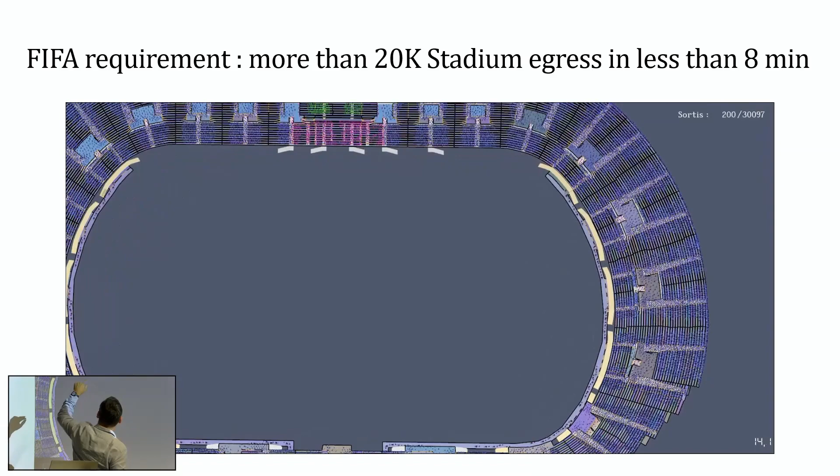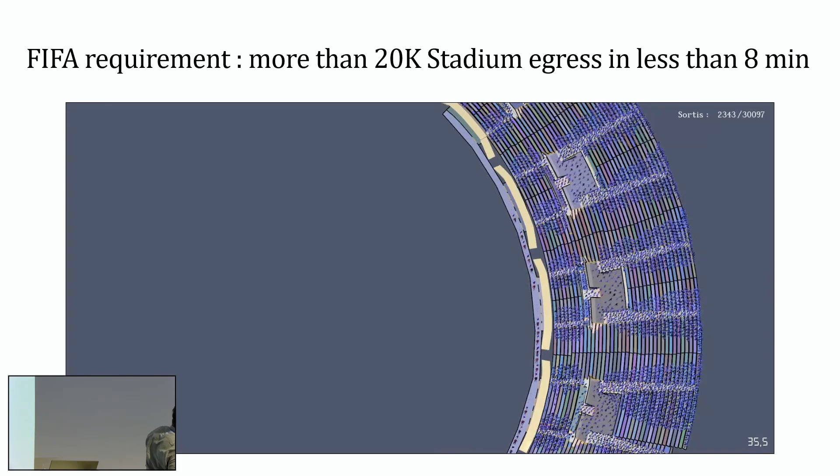If I take a stadium, FIFA requirement or the Green Guide requirement asks for an egress in less than 8 minutes. So for a huge stadium, in this case a 30K fans stadium, you have to evacuate the whole stadium in less than 8 minutes.

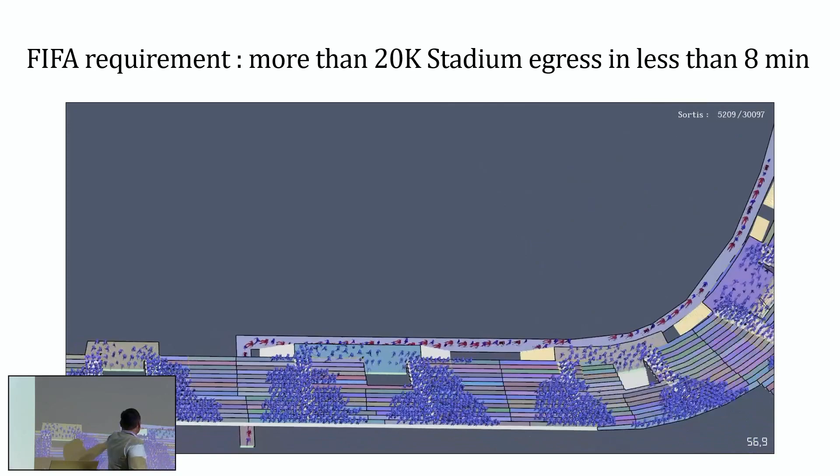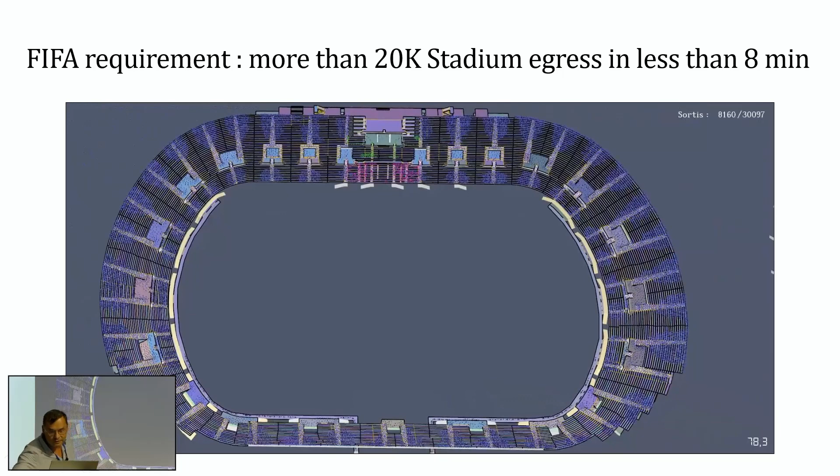Sometimes you also have people in wheelchairs. An interesting thing to know about stadiums is what they call, in French, a vomitoire, a vomitory, which gives you a good idea of how people are supposed to exit the stadium, fast and in bulk.

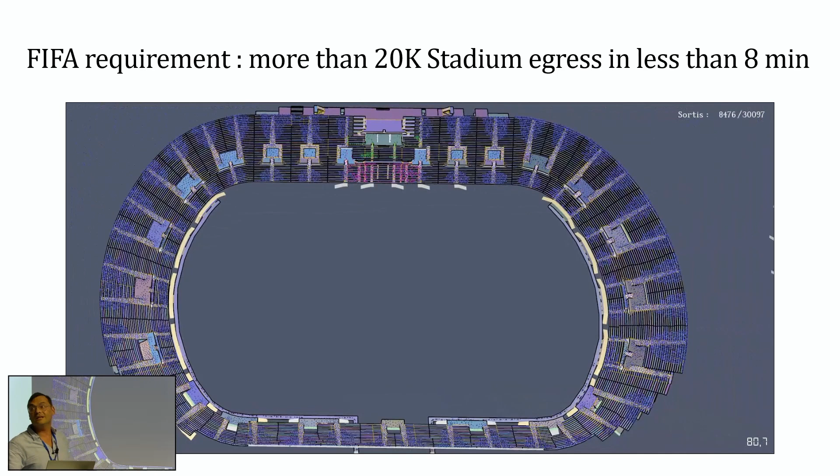And in fact, it's what everybody wants. There's one good reason for that: in all these stadiums there is a big competition for space between safety and money.

If you take a stadium, you always have this: bleachers with lots of people seated, then stairs, then exit platforms, and then the vomitory, where people have to exit in bulk and fast.

And this is money, because people are paying. So as a stadium builder, what you want is as many seats as possible in a small space.

On the other hand, this is big money too because this is a VIP place. But if you want to fit this less-than-8-minute evacuation, you also need space for stairs and vomitories. And of course, this is not money.

Anytime you try to improve the evacuation time, you have to enlarge your vomitories and your stairs, and the result is fewer seats, and fewer seats means less money.

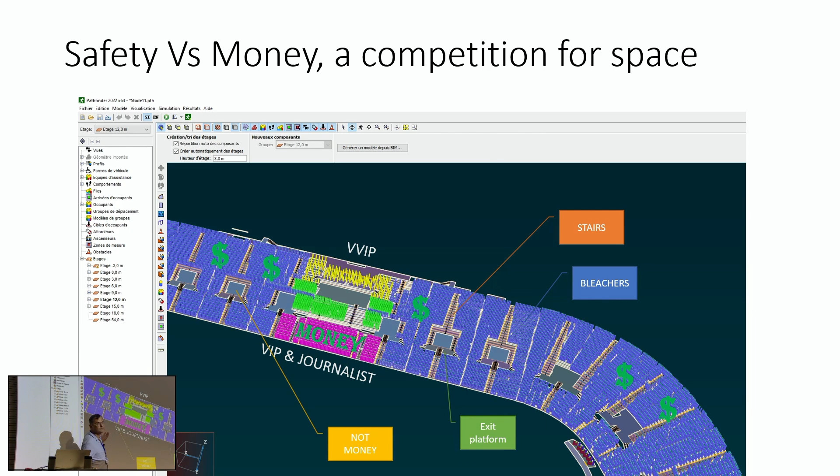There's a specific thing about the stadiums we are studying: there's one geometry which is kind of complex, the bleachers and stairs. The complexity is that stairs are multiply connected with the seats.

This means that in any simulation software—Pathfinder, MassMotion, or any other—you can't just say 'it's a stair' and expect it to behave as a stair. Because it's a stair with as many doors as alleys you have, and between two alleys, in a real stair, you'll have two steps.

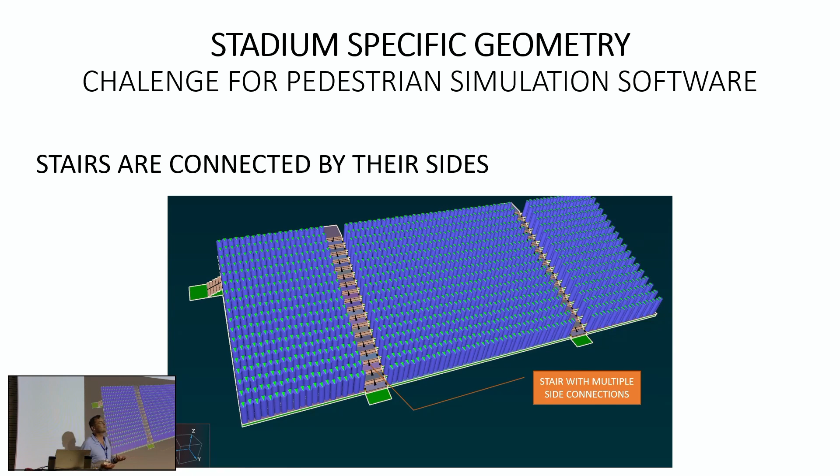So what shall we do with this geometry? And the other thing which has been mentioned by my colleague...

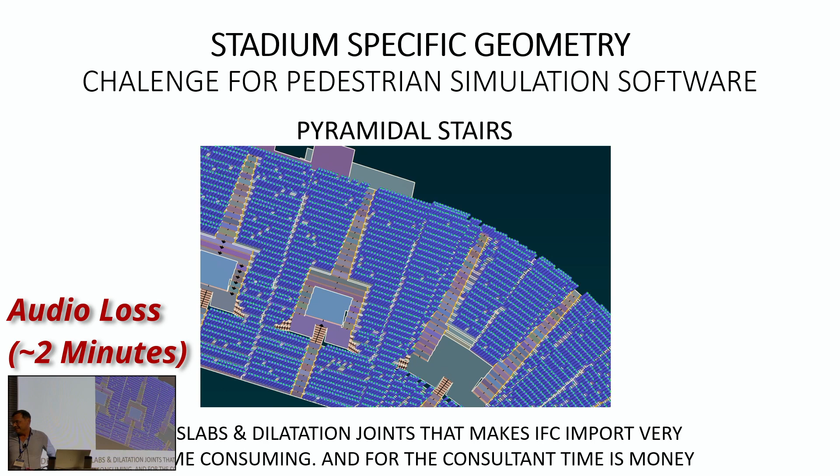Guillaume. Really? Shall I start it again? No, okay, anyway, it was not interesting. The interesting part is after, so don't worry about that.

What I was saying is that when you do a simulation project, behind that there is, as a consultant—because we are not researchers—always a customer who wants results fast and who has no money. So we need to be very fast building the model.

Sometimes you say, 'he will send me his IFC file, the architect will send me the IFC file, I will just import the geometry, populate my model, click on the button, and get the result.' But it never works like that.

One reason it's even more difficult with stadiums is that there are specificities we don't see in other projects. One is those pyramidal stairs: if you want more seats equals more money, it means you don't need those large stairs up there because there's nobody.

Also, one annoying thing when we import these IFC files is that the slabs are non-flat. At first I thought it was a mistake, but no—they're non-flat because it's outside and they want the water to flow, so they're slightly twisted or slopey.

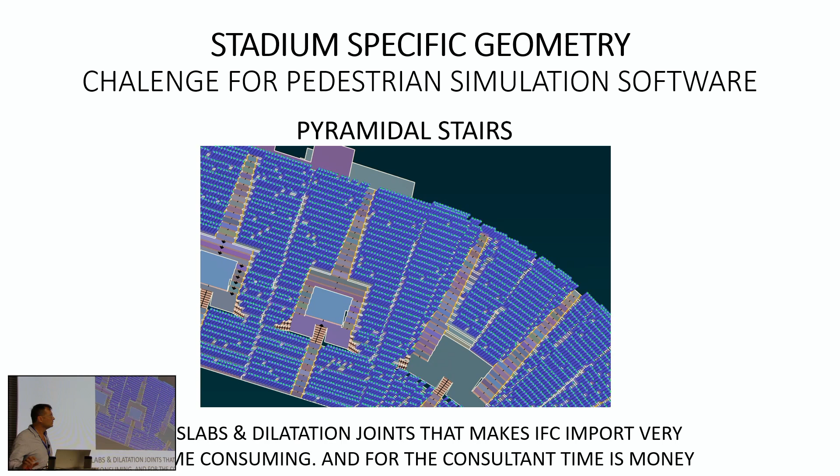Okay, if I come back to bleachers, what we have found in our project is that it's very useful to build a library of bleachers that you will be able to copy, paste, and modify in different projects. Otherwise, it takes too much time.

If you think about a bleacher, you have back seats, exit, front exit stairs. Don't forget about the hide and kiss area—teenagers will appreciate if you don't forget to modelize this area. Having a huge library of those bleachers can help a lot in making the project.

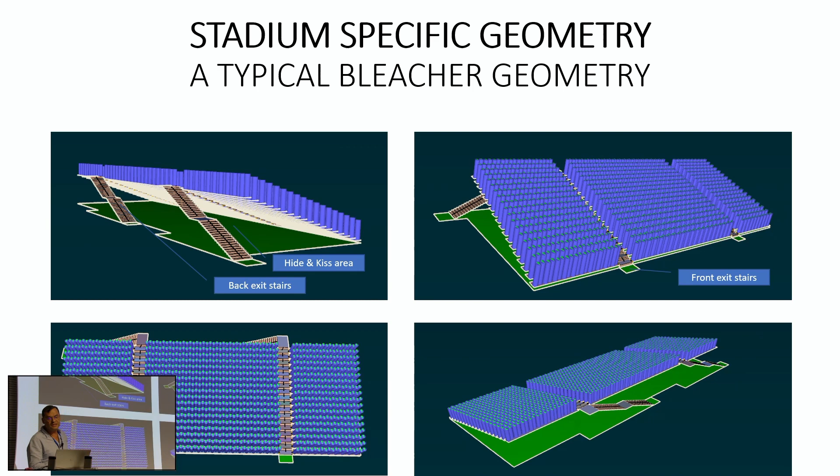So here comes the case study, and this is the very precise question we had to answer from the architects. In Abidjan Stadium, there are two options to link the exit platform to the bleachers. One option was that people would walk this way, take a stair, walk this way, and go out. The other option was that each alley would walk, take a small stair, enter the exit platform, and then walk. The very interesting thing was that option A and option B are absolutely identical in terms of number of seats.

So the idea was, now that we know we are not losing any seats using A or B, can you help us choose if we design it this way or this other way? Construction cost was about the same. So it's an interesting case study where simulation helped architects take a decision, which is not always the case, because most of the time architects have already taken their decisions regardless of the simulation result.

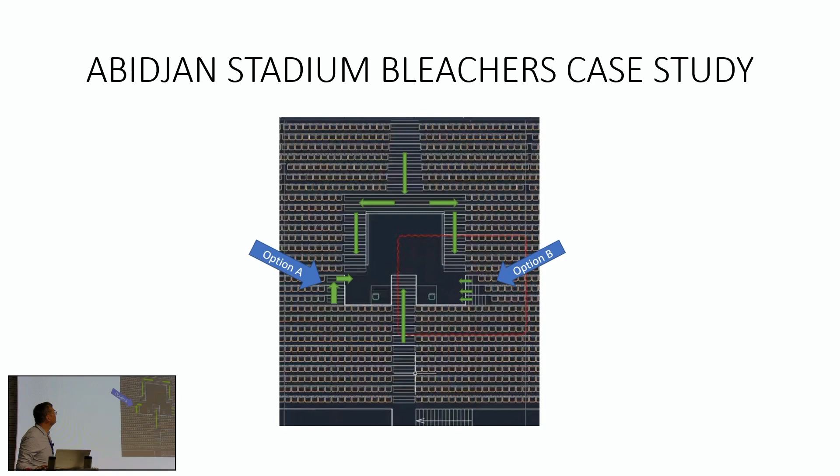So what we did is we built a small model of each case. This is option A, this is option B. There are exactly the same number of people, 1,028, with exactly the same characteristics. In fact, they were made by copy-pasting and just modifying the connection. This is option A, with people going up and then turning, and this is option B, with people going in small stairs to the platform.

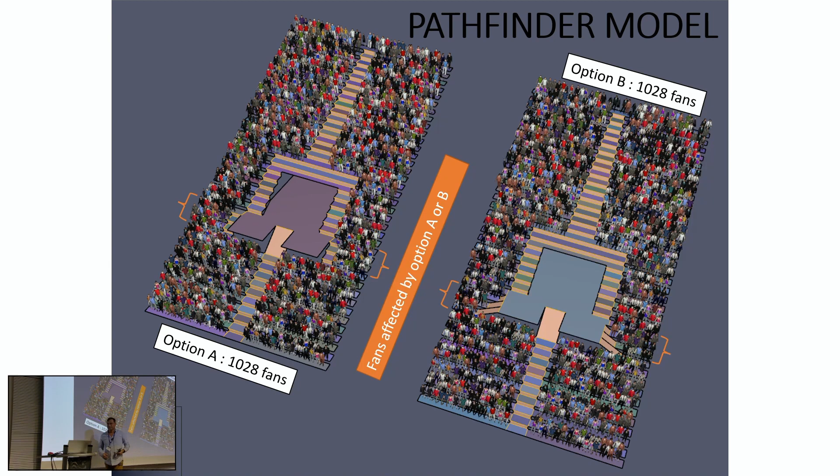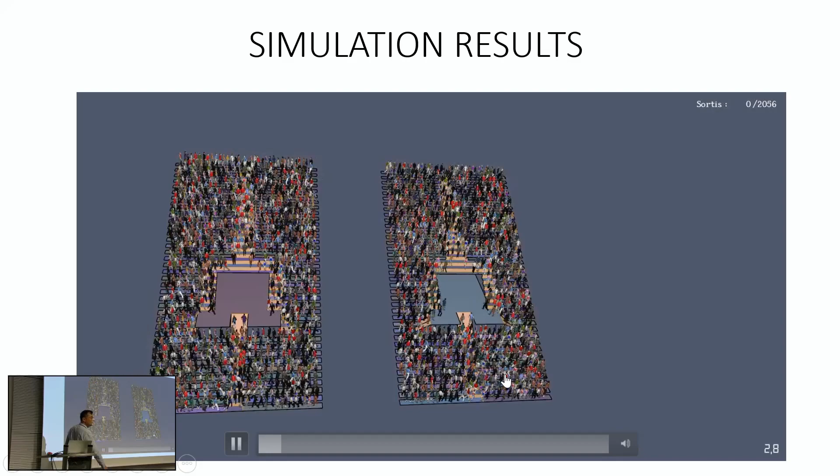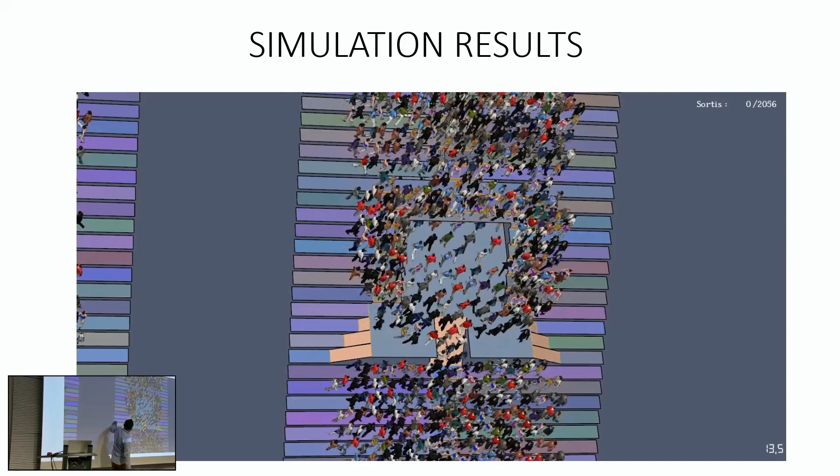If we do this simulation and try to compare those two situations, we can see that here they are emptying quite fast in these three areas, while here they are still stuck because they just move here and are blocked by people going down.

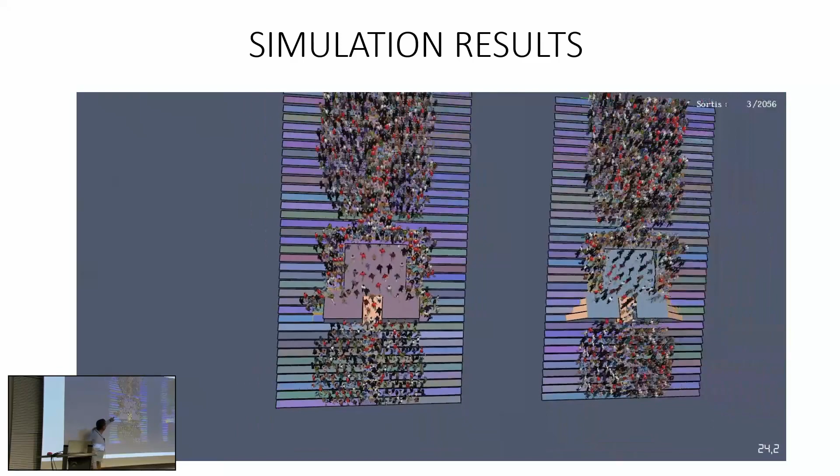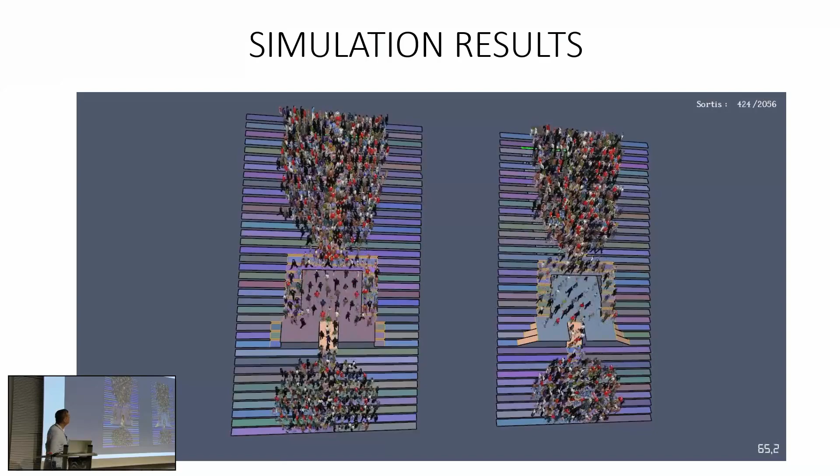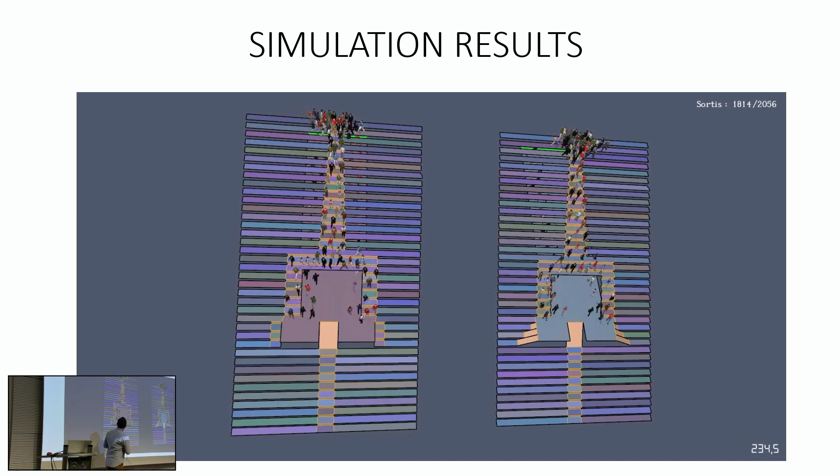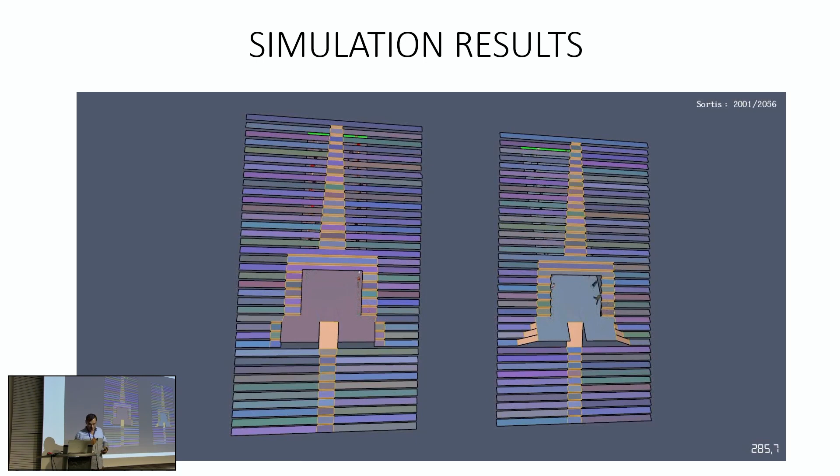But at the end, the thing which is quite deceitful somehow, it does not make any difference. So the evacuation is about the same for A and for B, which was bad because I preferred this one to this one, but reality is that it does not make any difference.

And then after it's symmetrical, it's identical. So what we can say is that option B gives better results during the first 30 seconds, then option A catches up and equalizes, and at the end, for the last part of the simulation, it's the same.

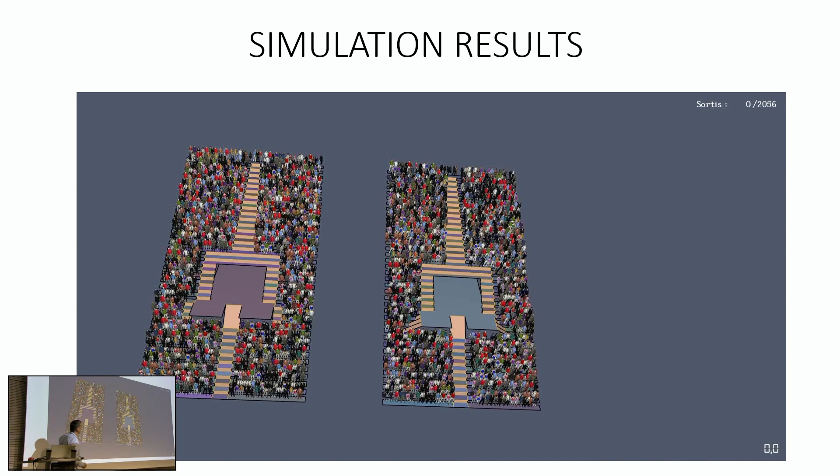So in this case, finally, this video helped the architect choose the option with people coming from the side. It's a good example of a case where a small simulation led to a decision that convinced the architect to change his plans.

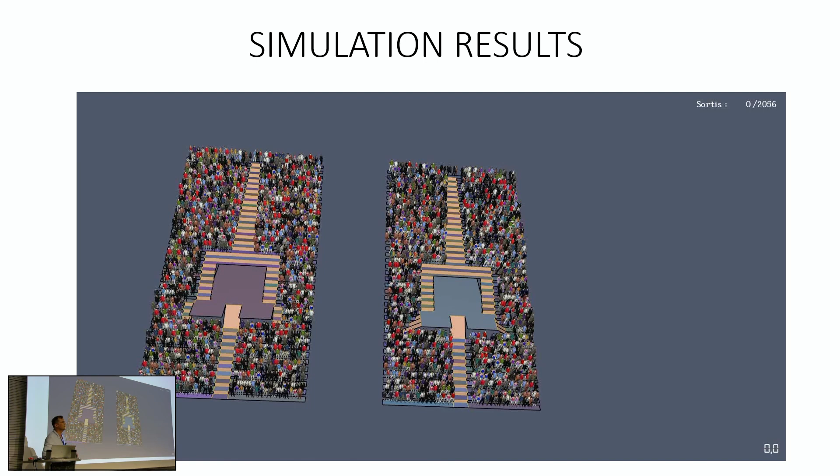And what we lack is, we put a lot of effort in trying to find ways to adapt our models and our geometries to those bleachers and those stairs. But we have no data. We have no measurement of how fast you go from an alley to a stair, to a perpendicular stair. And we are just obliged to make assumptions, to make modifications so that the model works, but there's no guarantee that what we're doing is reality. It's just a model, it's just a simulation.

The good point of this is that somehow people think it's very precise, and they buy the result, and they take their decision. It can be a pity, but on the other hand, it's something good, because somehow you manage to help people take decisions with the best tool you had. But we just have to remind people that they're taking their decision on that, and they are not taking their decision on this fantasy of a twin stadium.

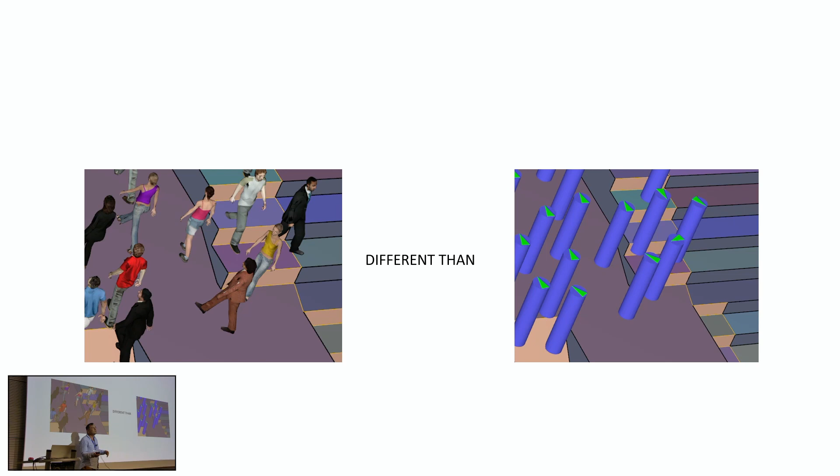There is no twin stadium. There is a model that is based on a very simple assumption of cylinders walking at a speed with a direction. Okay.

Thank you. Great. Questions in the room? Okay. Let's go this way.

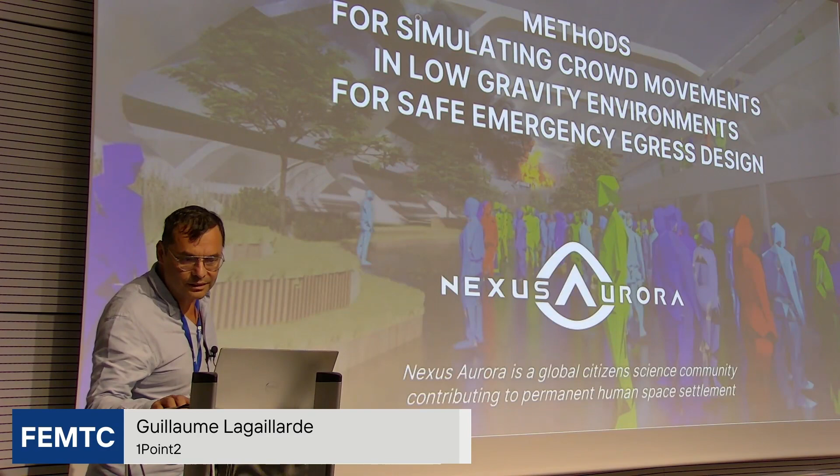Hi. First of all, thank you. It was very interesting. I was wondering, you mentioned at the beginning the 40 centimeters of the aisles, and I was wondering how you implemented that in your model. I cheated. Now, in a model, oh, sorry, I went too fast. I just cheated. I said I'm on the moon, and it worked.

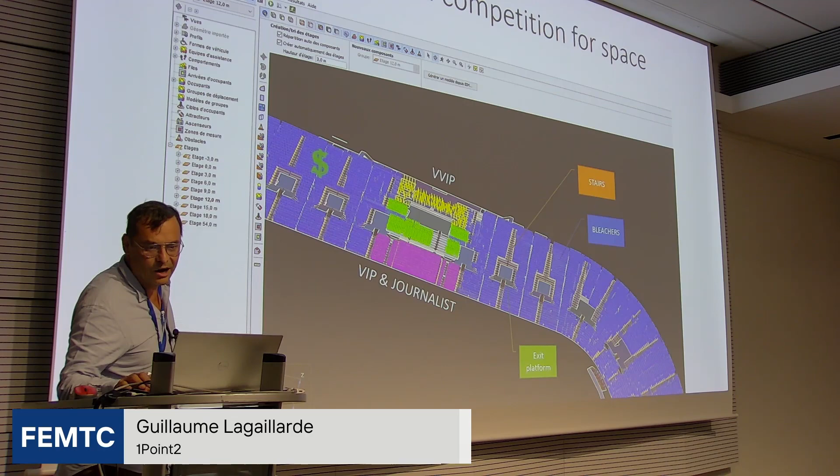No, in fact, what we did is that we just erased the seats. And we assume that if I've got an alley like that plus a seat, I've got an alley like this. And then I just enlarge my door here. So you are forced to cheat somehow, because your cylinders cannot sit. So as your cylinder cannot sit, and as you're not doing a micro simulation, a sort of ergonomic simulation with people with legs and arms and everything, then you have to remember that your agents are cylinders. So then you need to adapt your geometry to your agents.

There's no other way. And that's why it's legitimate to cheat, because you have a cylinder that is averaging a very complex person. Then your level of detail is this. And if the level of detail of your geometry is much higher than the level of detail of your agent, you're making a mistake also. You need to have something which is homogeneous in terms of hypothesis. This is why we cheated.

And we cheated by saying, okay, we just get rid of the seats and enlarge the access to the stair. But in reality, the access to the stair is also enlarged because you've got those two steps and you can access here or you can access here. So it's legitimate to enlarge your access because it's already enlarged.

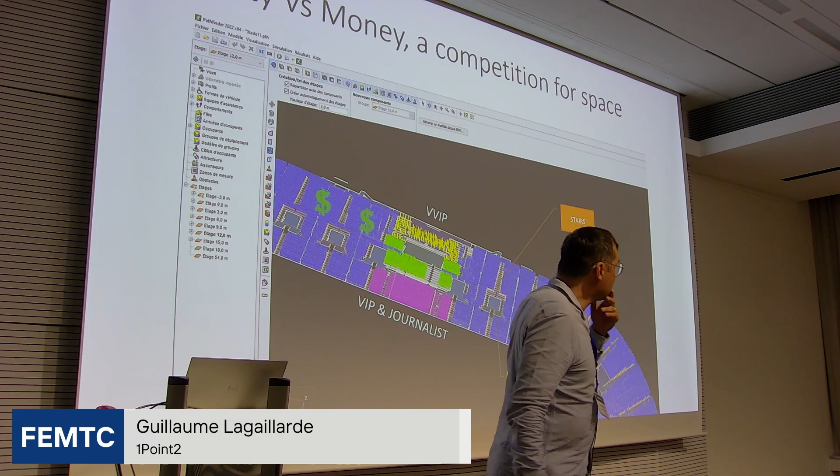So you changed the geometry because of this 40 centimeter problem. It sounds a little bit too much work. So did you think about making the pedestrians smaller? Because in this kind of geometry, the shoulder is not a decisive factor, I would say, rather the legs. Yes, you're somehow right, but I did not want to change the geometry of the people, nor the speed of the people, because it's too much of a cheat. Because if you change the geometry, for sure they're smaller, for sure they evacuate faster.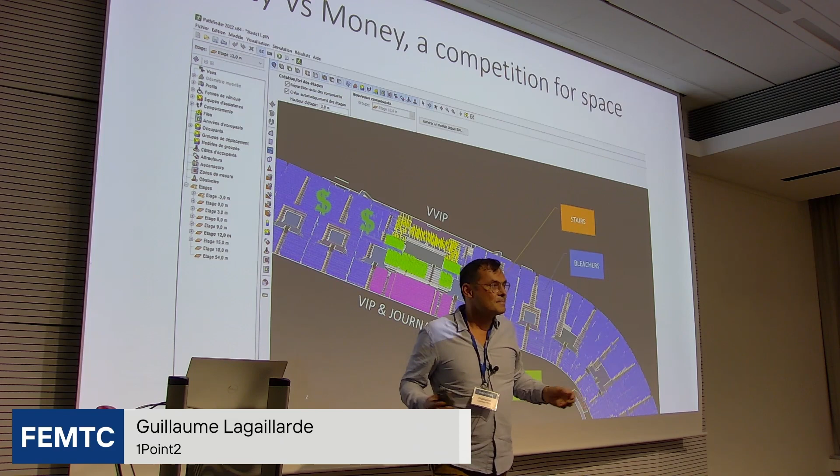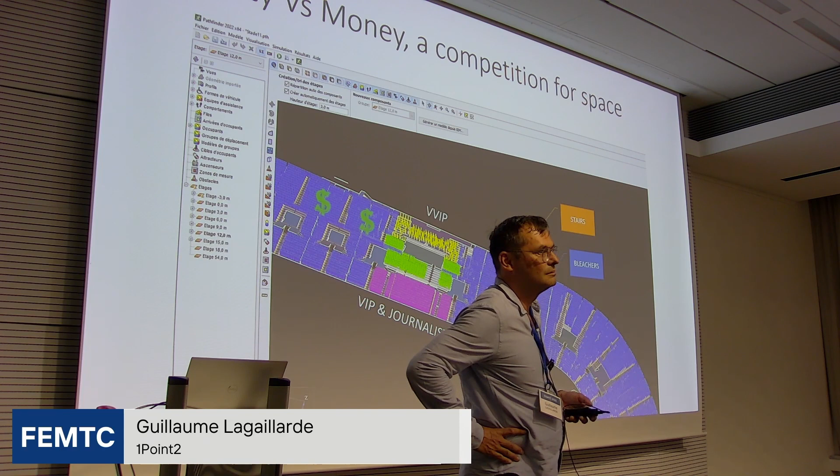No, not necessarily, because if you think about it, people in the stadium move freely in these alleys, although the shoulder is 40 centimeters or more. Why? Because the legs don't have a 40 centimeter diameter. So it's natural movement. And here, mostly this is a single file movement. It's not a crowd in that sense, so it's not too much cheating, I would say. It's rather, sincerely, realistic.

I don't know, because here it's a crowd, and here there are stairs. If they are smaller, they are more in parallel. But you're right, there are many ways to work around this problem. I prefer to cheat enlarging these doors, because what happens here is not very important; what makes the difference is the time to access these platforms, and what happens upstream does not have an impact on the output.

But I wanted to have realistic people here, because I don't want to have too many people in the stairs, and I don't want them to have a higher density here than what would be in reality. Yeah, but you're right. Both things are possible.

And that's what the geometry collision feature is to help resolve: they can step through 20 centimeters easily now, but still have the correct shoulder width, the correct crowd density, interpersonal distance. Another thing you can do is reduce their size here and change their profile once they're here. But it takes too much time. It's too long.

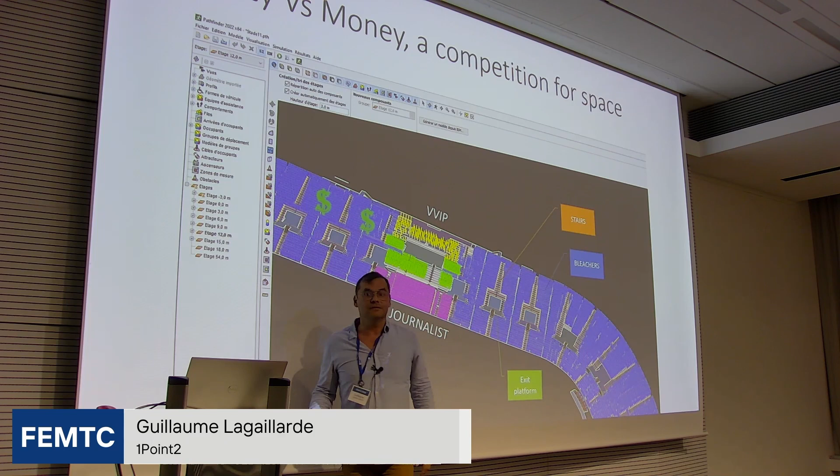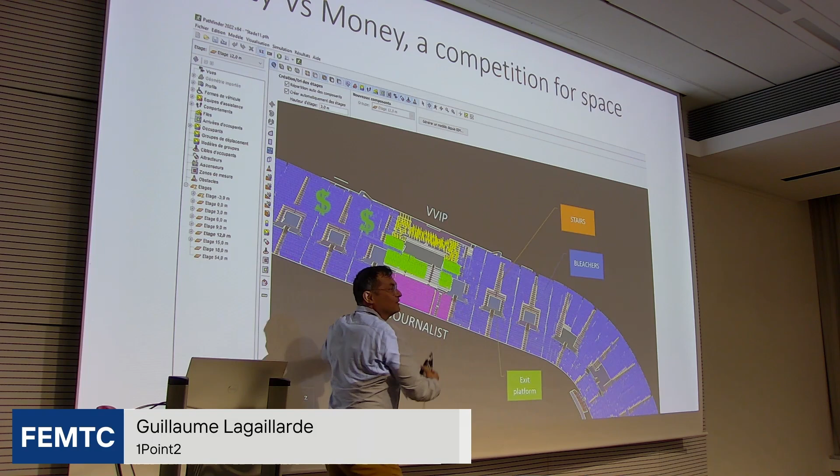But in other projects, we are taking into account what's outside. In this case, there's a high density here, but once they're out, it's open air, and they're considered safe. Also, we have to remember that the whole objective of this is to prove to FFF, the French Football Federation, that we evacuate in 8 minutes. We don't want to just add obstacles to be more realistic and make them evacuate in 20 minutes. Otherwise, we cannot build this thing.

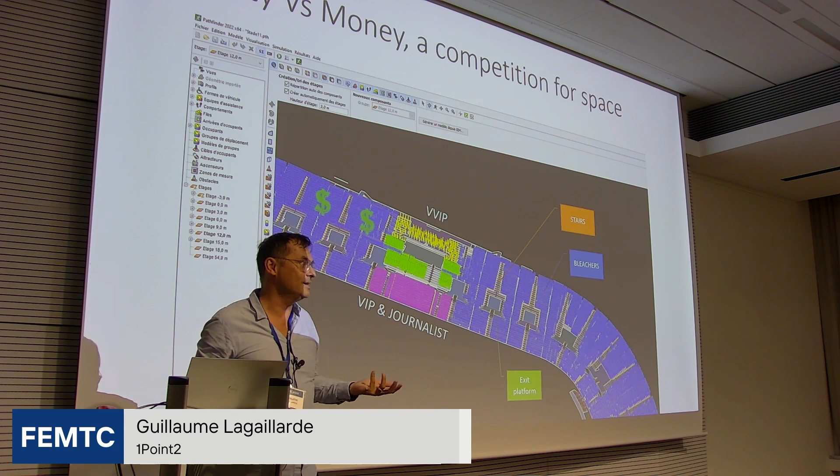The problem in those studies is who's paying, and sometimes, even if you're very honest, the guy who is paying you orientates your work. There's no way to make it different.